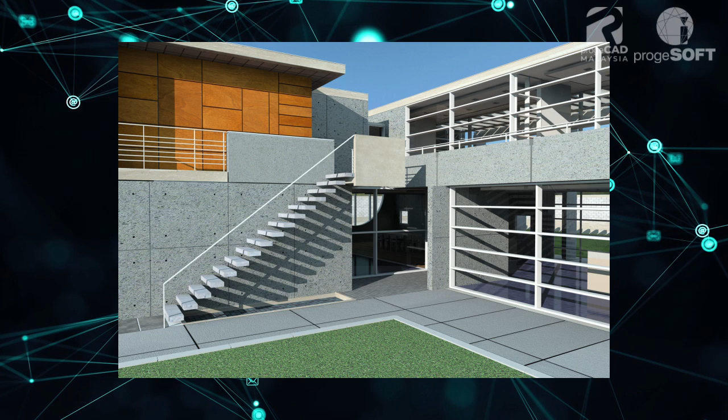Artisan is the perfect rendering solution for busy designers who want to easily create images to speed up the design and decision-making process. Artisan comes with a wide range of preset materials and lighting setups, plus the ability to create your own realistic materials, making Artisan a pleasure to use.

So what can we do with Artisan? We will go into this and show you more about Artisan in another video demonstration. Before we go further to that session, let us start with Artisan installation steps on progeCAD.

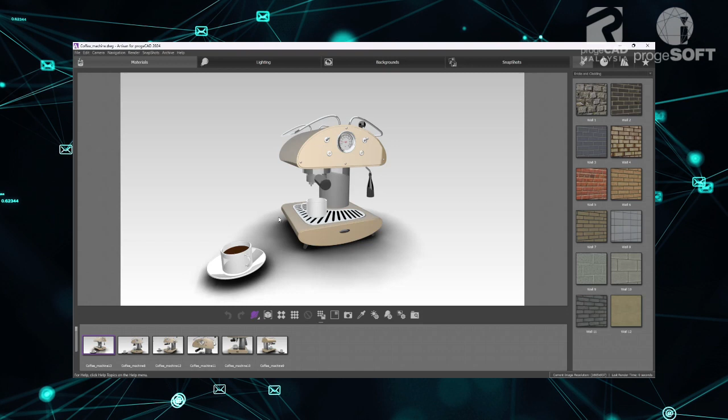Artisan is an add-on rendering tool in progeCAD. When you install progeCAD using the standard installer, Artisan will only be available for installation when you start using the Render tool. It requires around 400 megabytes for the installer files to be downloaded before installation starts.

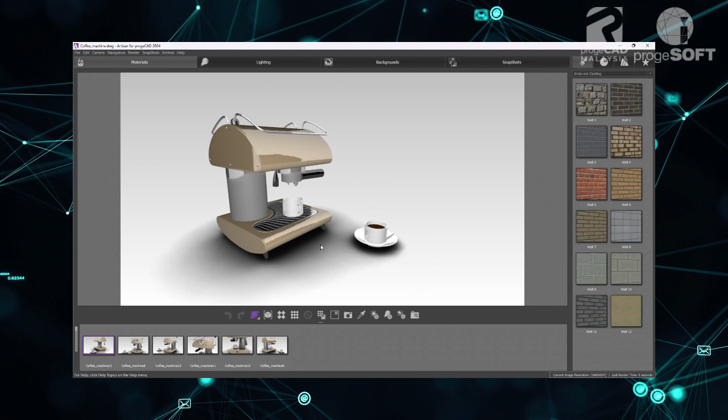If you're planning to render in progeCAD, it is recommended to install Artisan once you've completed progeCAD installation, otherwise you may leave it as is.

This standalone installer requires progeCAD to be already installed on your device.

To begin Artisan installation, let us start with creating a new file. Notice that without an open drawing, either a new file, blank file, or existing drawing file, you will not be able to install Artisan on progeCAD.

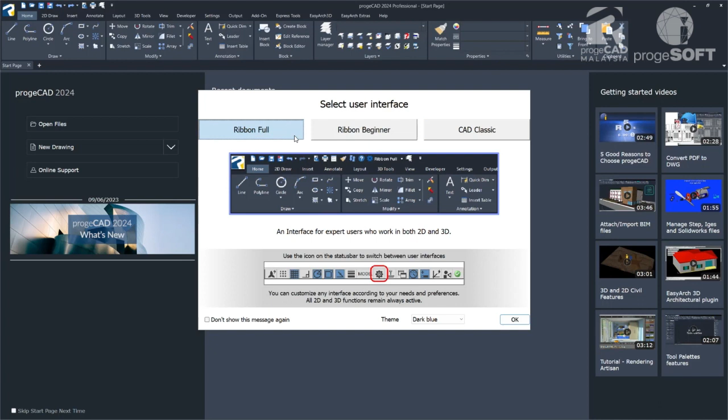When you start progeCAD for the first time or in default mode, a pop-up window will prompt you to select a User Interface. For this time, just choose Ribbon Full and click OK. We will get into details on User Interface selection in another video session.

Upon selecting User Interface, you will see a start page showing options to open files, create new drawings, get online support, a list of recent documents that were opened before, and a series of videos showing some tips and short tutorials.

You can disable this start page by clicking on Skip Start Page next time, located at the left bottom corner of the screen. But let us leave this as is for this time.

In this session, we will simply click on the New Drawing option and then select PCAD isometric.dwt in the template drop-down list. We will go more into details on choosing a new drawing template later in another video session.

Once the new drawing is open, you can see the Drawing 1 tab below the Ribbon Panels. The running number 1 may appear as a different number, depending on how many times you have started a new drawing before you exit from progeCAD.

Now, go to the Ribbon Menu, View tab, and look for the Render Panel, and click on Open Render Tool. This will automatically execute Artisan installation if it is yet to be installed.

When you are prompted to install, click Yes. This advanced render module is available free to all progeCAD users, so you can proceed with the installation.

And don't worry, this option will only appear if Artisan is not installed in your progeCAD. If it is already installed, this installation message will not appear on the screen when you use the Open Render tool.

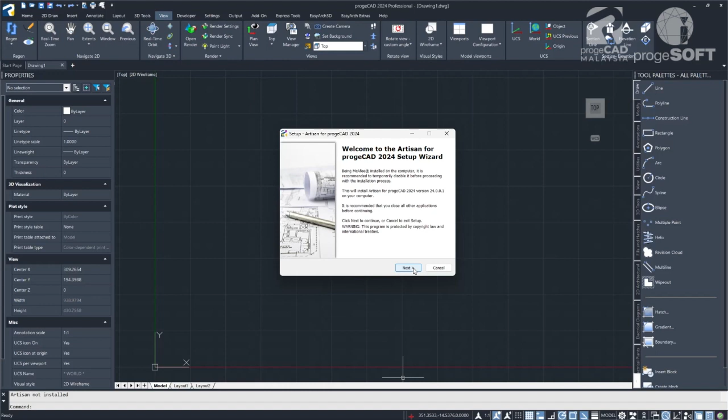Once the Artisan Setup dialog box appears on the screen, click Next. There is no need to change the destination folder. It is recommended to use as suggested. Click Next to proceed further.

Artisan is now ready to be installed. Click Install to start the installation. Wait until it is completed, and click Finish. The installation is now completed.

Now we are going to check if the installation was really successful, so we will try to start Artisan Render. For that, we must have a 3D model. We will use the existing sample included in the package.

Go to the Ribbon menu, look for the View tab, and find the Render panel. Click Render and choose Open Render Examples. A dialog box will open a folder containing 3D model samples, useful for learning and exploration. Now choose bedroom.dwg and click Open.

In this video, I'm not going to go into detail on how to use Artisan on progeCAD. Instead, I will just show a quick demonstration on how to apply materials on the models, just to make sure the Artisan installation was successful. We will learn more on rendering using Artisan later in other video episodes.

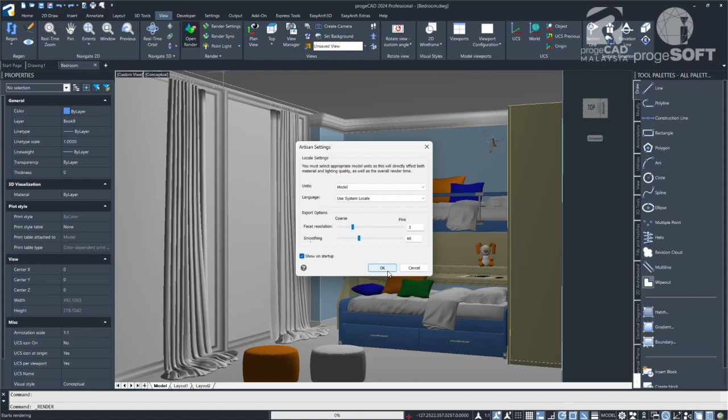Now click on Open Render to open Artisan settings. No changes or modifications are required at this stage. Click OK, and Artisan will be opened. The 3D model drawing is now loaded into Artisan and ready for some fancy stuff.

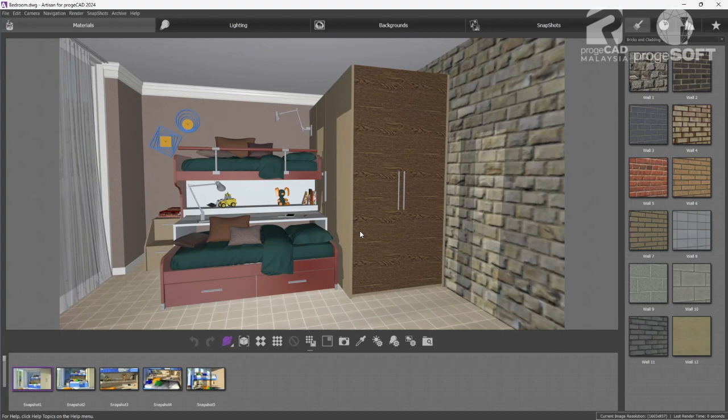Just a very quick overview. I will apply some materials on the assets inside this model. You can view around the model in 360-degree rotation, so it's quite interesting. Let's just play around browsing the materials, select, and apply them on the 3D model assets.

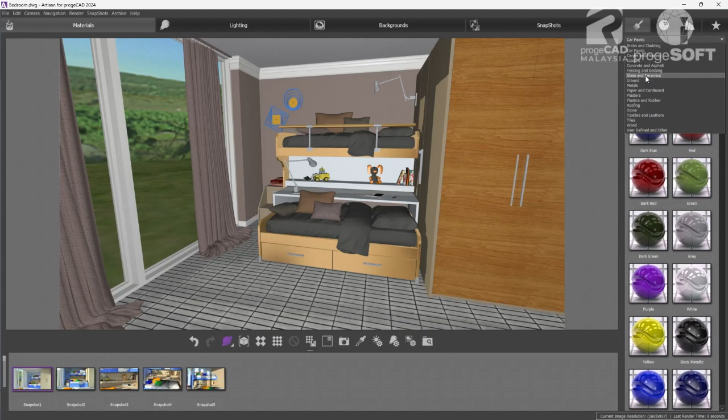I think that would be good enough for now. Let's go to the File menu, click on Save, and then Exit to return to progeCAD. Artisan has been successfully installed for progeCAD, and you are now able to produce 3D renderings for your 3D model at your own convenience.